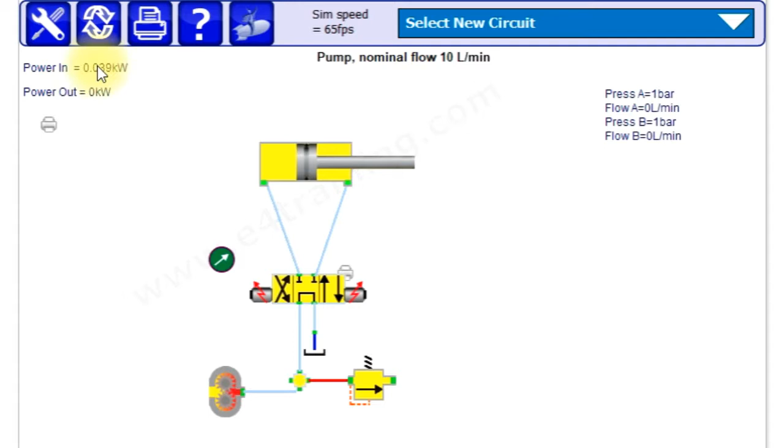We're trying to design the most efficient system, and the intention is that you use the simulation program to put your own components, sizes, and see which is the most efficient system for you before you actually build it. So let's look at this circuit here.

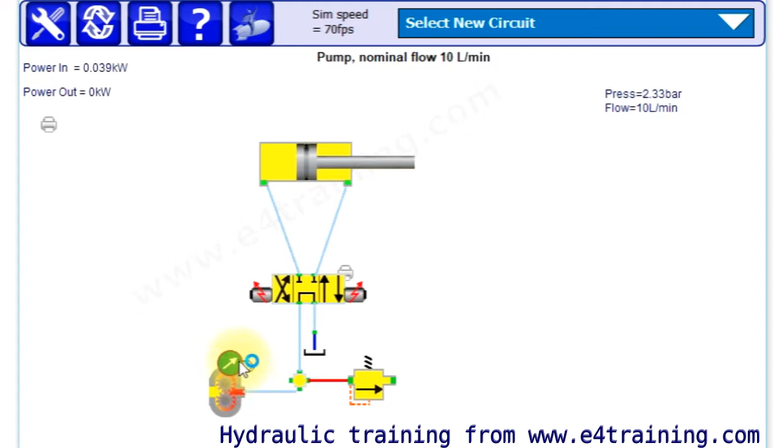We can put the test gauge on. It tells us our pump has a pressure of just over 2 bar, flow of 10 litres a minute. It's fixed displacement, so the flow has to go somewhere. Now it's going around straight to tank, an open centre valve, so we're using very little energy, which is good.

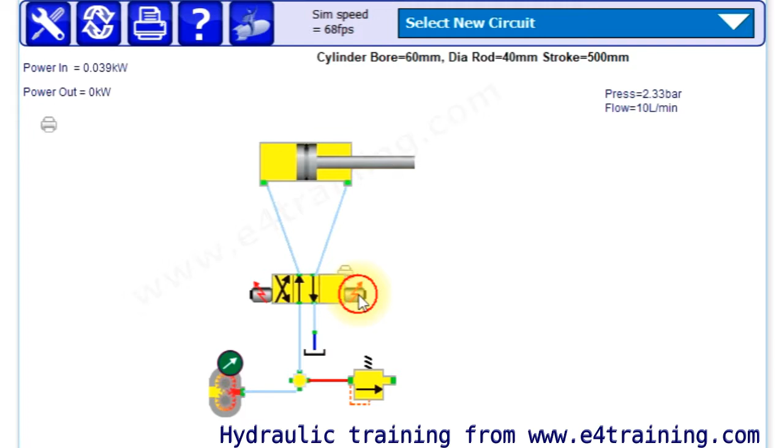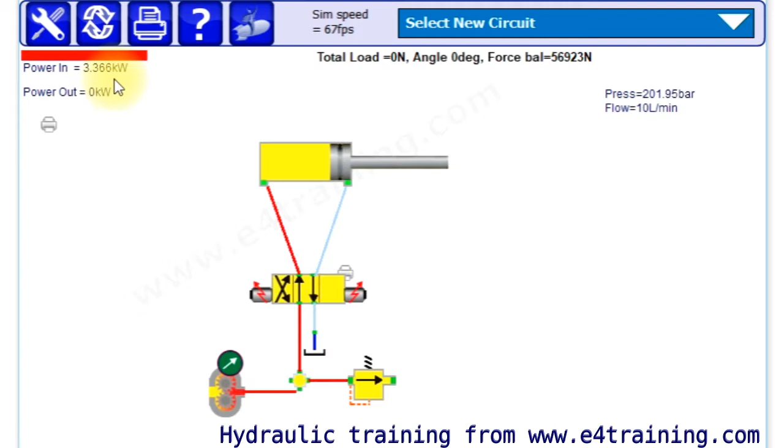If we operate the valve, then it runs to the end of the cylinder again using very little energy because there's not a lot of load on the system, but actually it's using full energy there once it's against the end stop.

Set in the center position again, it's nice and efficient, but if we switch to a closed center valve - because the open centers quite often aren't usable because of the rest of the circuit.

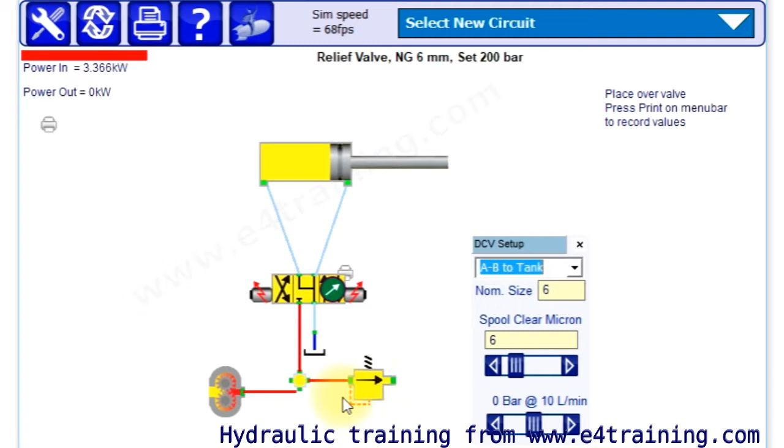Now the relief valve is operating, so the relief valve is open. We're putting all of our flow through the relief valve at maximum pressure, so we're running at over 200 bar, and you can see we're using full power. So not the ideal system.

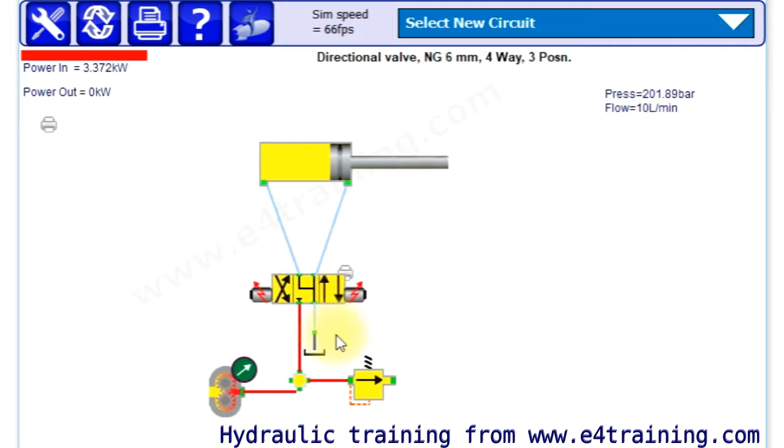If it's sitting on valves closed most of the time, like a lot of them do, then you're just wasting all your energy, which is not good at all.

So what we can do - select the free pump energy usage comparison, select our new circuit, and we've got a variable displacement pump here now. And we can see with a variable displacement pump, even though we're using the closed center valve, we've got 180 bar, so we're working full pressure on it.

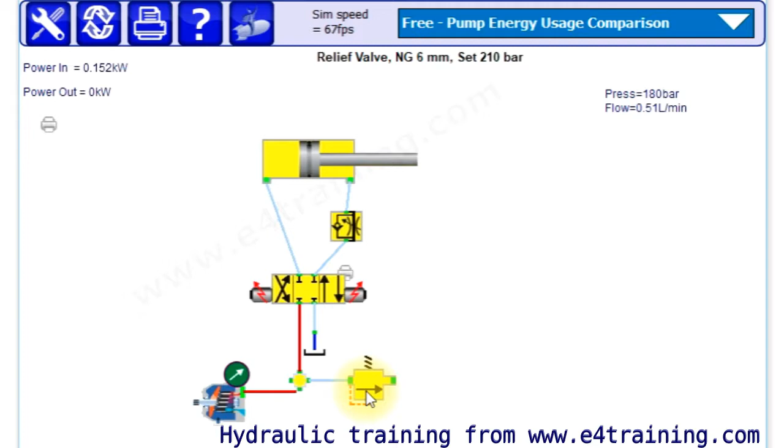The relief valve is shut, it's not doing anything, so that's good, it's not wasting energy. But the setting now is set higher than the pump. You could argue we don't need it, but it's a nice safety device. We pretty much always put one in for additional level of safety, which again is another good thing.

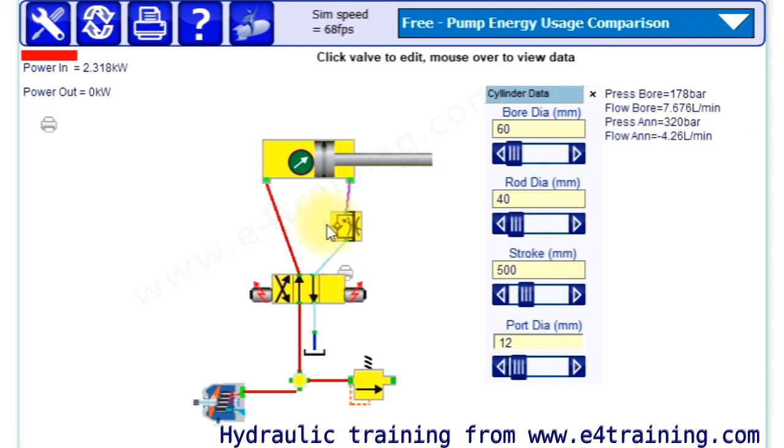But you can see as it's sat here, no flow, using very little energy. When we operate it - I'll double click on there. If you double click on the body, it stops the cylinder moving. The circuit still thinks it's moving, but it just gives us more time to investigate.

And as we're moving now, we are using more energy, but that's because we've got a flow control valve in. And if we look at this, we can see this is set to 4 litres a minute at 300 bar, which we've only got 180 bar on our pump.

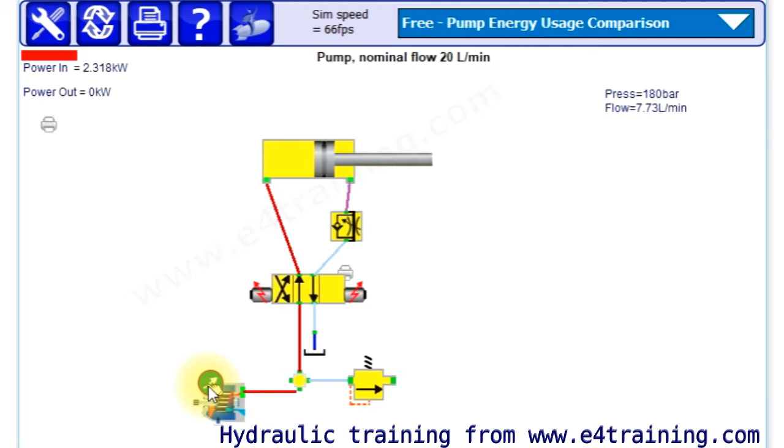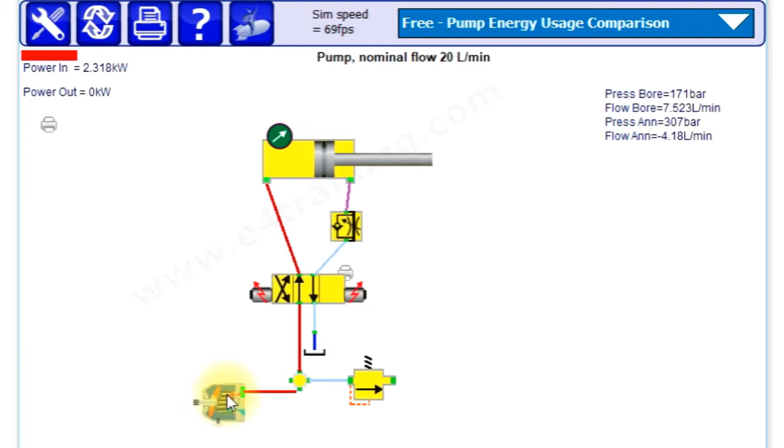So we're getting lots more pressure, and that's because if we follow the circuit through and look at the cylinder, we've got different areas. So we've got a pressure here of 170, we've got a pressure on the annulus side of over 300. So we've got flow here of 7 litres a minute from our pump, and that's not full flow. The pump is capable of more, but because it's pressure compensated, it's regulating, and it's only giving us the flow we require.

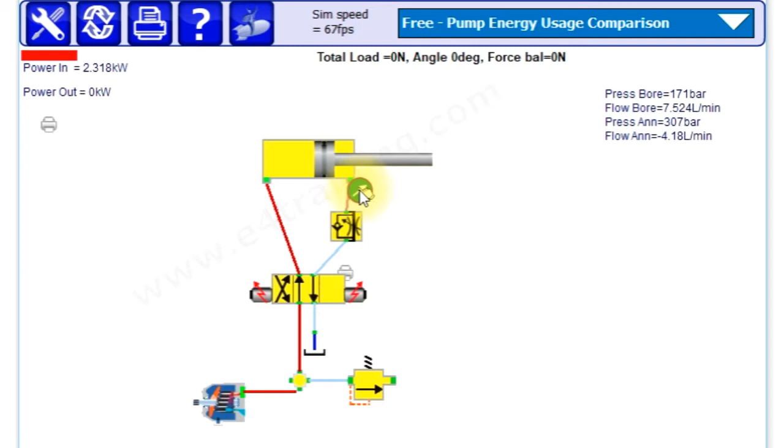And you can see we've got a smaller input power. We're using less power than we would do if we were driving with all the flow. But we are generating this intensified pressure on the annulus side, so you do need to be aware of that and be careful, because you can't use a cylinder that's rated lower than this full pressure that it will see.

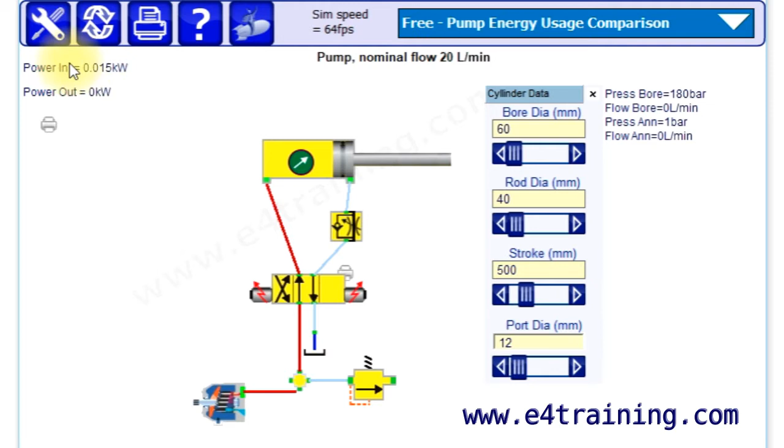But this is a nice little design. We'll just release that, and again, when we get to the end stop, the pump backs off, energy goes down because it's only supplying the leakage flow through the valve. So let's take this back - no flow control this way, so we'll work at full flow.

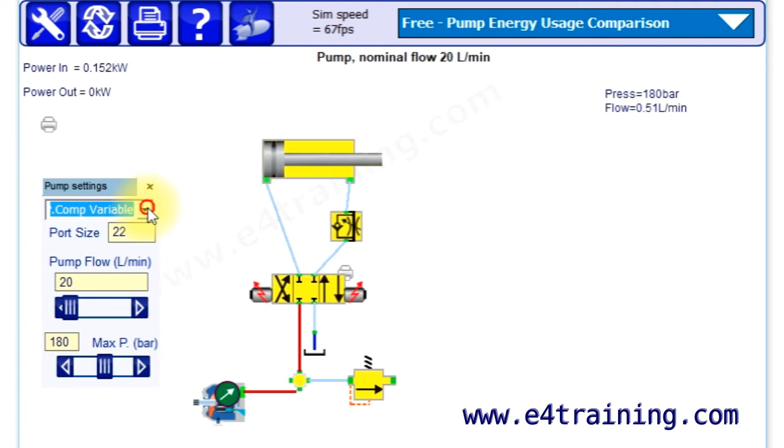Now what happens if we change and put in the fixed displacement pump? We're on closed center, so the flow coming here has to go somewhere, but we've got our relief valve set higher than our pump, if you remember. So that's going to cause our pump to explode, which is not a good thing.

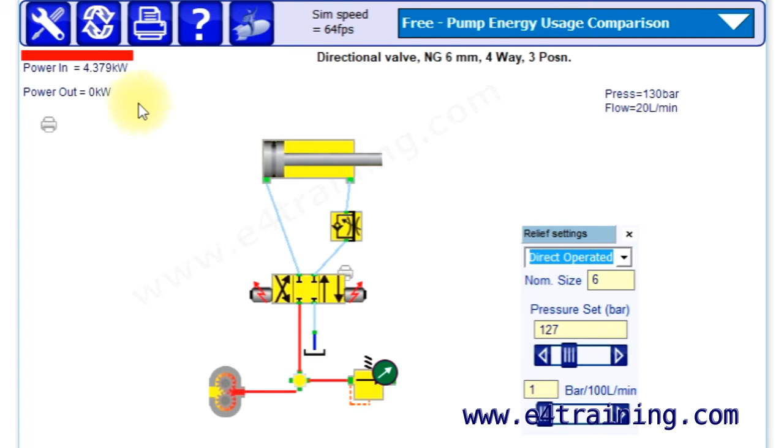So we'll have to reset the relief valve. Now the relief valve's open, and we're wasting all our energy again through this system. And the important thing now is if we operate this, and we'll just stop it again, we can see that we've just got this, it's a bit lower in pressures.

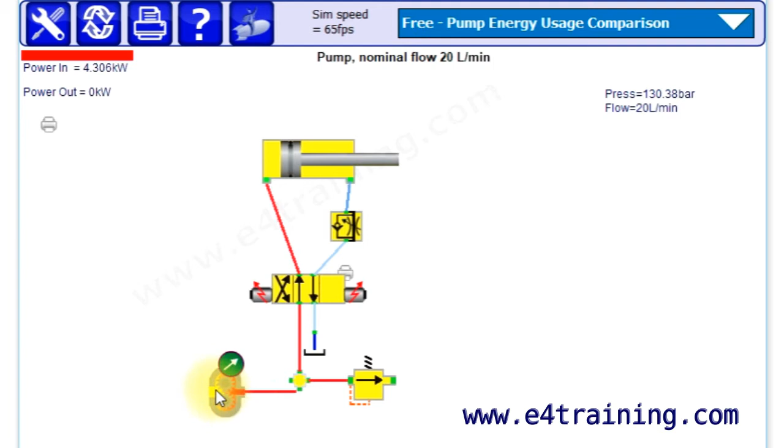We've got our 4 litres a minute here, but notice the pump has to produce its full flow. So we're set with 20 litres a minute, and it has to produce that flow. So that flow will go across the relief valve, which is why pressure's gone up to our new relief valve setting. So most of the flow is going across the relief valve, and we've got some flow going across here.

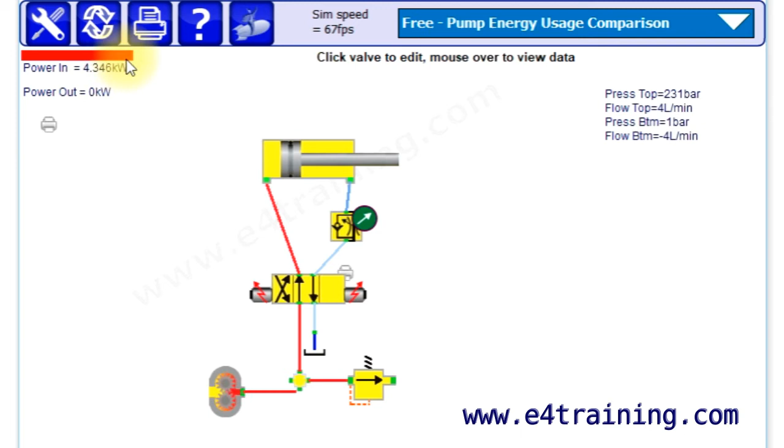But again, look at the energy usage. It's an inefficient way to do things because we're using a lot more energy than we did with a variable displacement system. It's a cost issue - it might be cheaper to do it this way, but you need to look at that, look at your own systems and decide what to do.

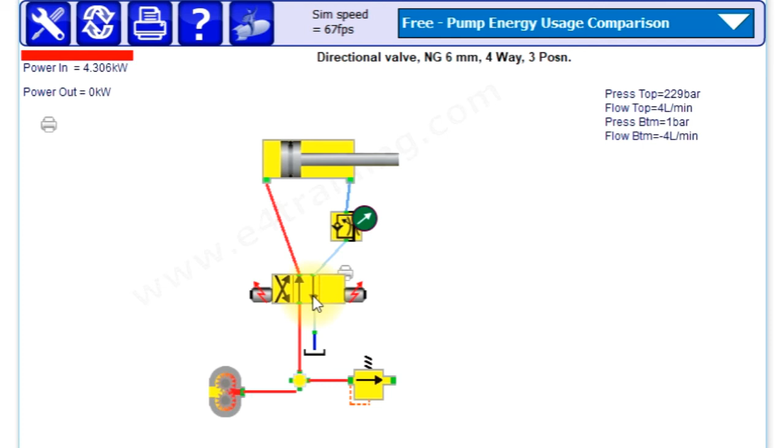But again, you have to be aware of these issues, the intensification and also the energy usage under different center conditions and different flow control conditions. I hope that's helped.